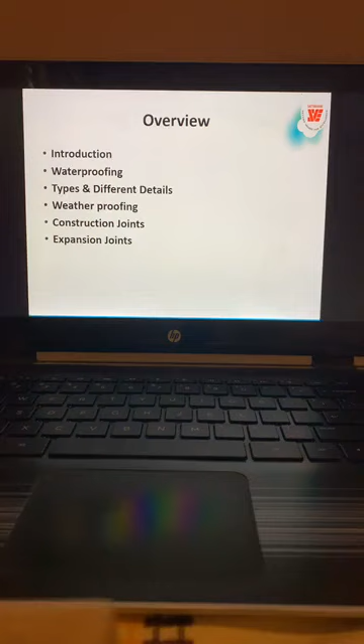So today is the first topic of the series, that is waterproofing and weatherproofing, which is a very important subject as far as built environment is concerned, and probably the most ignored subject. So today we'll be talking about these two aspects in addition to others. The overview of my topic is introduction, waterproofing methods and details, types of different details, weatherproofing, and we'll talk about construction joints and expansion joints. So this is the overview of my talk today. So we'll move on.

Humans need clothes like warm clothes, thermal clothes, raincoats, different coats we wear. Why not the same thing for buildings also? Structures also need, like humans, water and weatherproofing. Humans need water to live, and structures fight water to survive. This is a quote by me - when I was preparing this presentation, I got this thought. Yes, we need water to live; without water, a human being can't survive more than 2 or 3 days. But structures fight every day against water for their survival, that is durability.

So one way is to give water free passage to reduce its attack on structures. This is another method I followed in one of the projects - instead of fighting the water, give it an honorary exit from the structure, that means drainage. Allow the water to flow so that it won't attack our structure. So don't build the pressure, relieve the pressure. This is another method of protecting structures from water attack so that structures will survive.

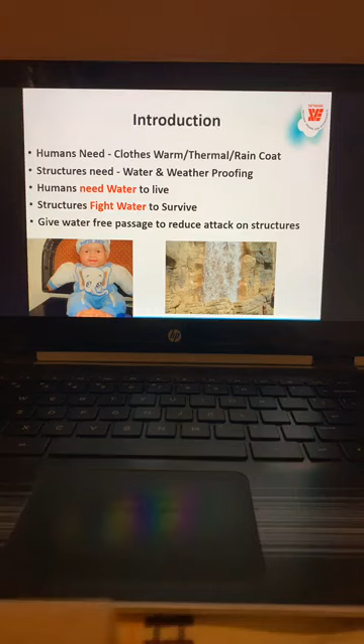So what is waterproofing actually? Waterproofing is a treatment to the structure, a protection to the structure, to prevent the contact of water, moisture, vapor or any other chemicals. Structures are in contact with water through the foundation - we can't build any structure without a foundation. So the foundation needs to be protected from these attacks like water and moisture. Above ground, it is moisture and vapor. These are the possible exposures for which we have to give coating to the structure - waterproof coating or protective coating.

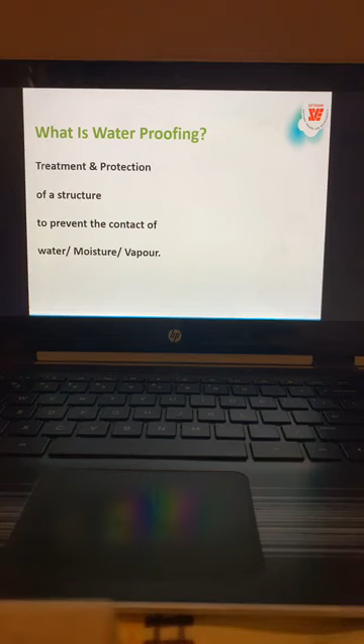So why waterproofing? To prevent water percolating concrete or any structural element as it is porous - mainly because concrete is porous and concrete is always reinforced, and reinforcement needs protection from corrosion due to exposure to the atmosphere. So we have to have this waterproofing layer as a barrier for the structure. People think waterproofing is for preventing water from entering. No - it's for preventing water from percolating into the concrete. Let us all remember that.

Another reason is to maintain cover for normal exposure conditions. If we don't do waterproofing, the cover to reinforcement, particularly in retaining walls, foundations, and slab on grade, has to be increased. Let us remember this - irrespective of water table, we have to increase this cover to prevent corrosion of reinforcement steel. That is another reason, because without waterproofing the reinforcement will corrode, whether we are able to see it or not, it will be corroding inside. So we require a waterproofing barrier.

For exposed structures above ground, from atmospheric humidity, vapor, and rain, we need a water barrier for the structure to enhance its durability. This is another important thing.

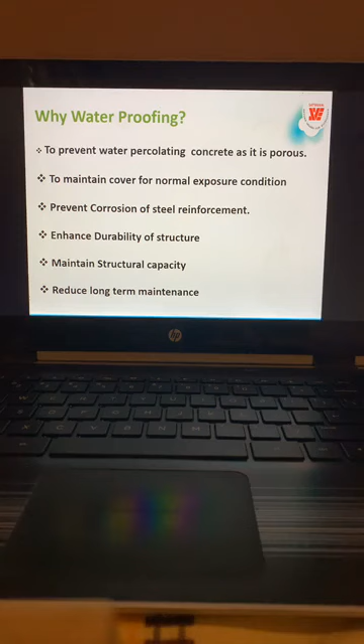So water penetration, how does it happen? We have honeycombs, sometimes very fine pores, shrinkage cracks, construction joints, expansion joints. These are all the causes where water can enter into the structure, so we have to take precautions to treat the structure for all these reasons.

And penetration into concrete happens due to capillary action - the pores in the concrete, since concrete is porous, not impervious. So to prevent water penetrating through capillary action, we have to have a water barrier. Next, hydrostatic pressure also forces water through pores - even without capillary action, sometimes hydrostatic pressure causes this penetration.

Thanks to my friend engineer Bheemrao, a consultant from Hyderabad, who after listening to my talk on RCC structures where I mentioned waterproofing for footings, shared photographs of a 25-year-old structure which was dismantled, and a photograph of a footing where the water table was 200 meters below ground level, showing corrosion in the reinforcement bar despite good concrete.

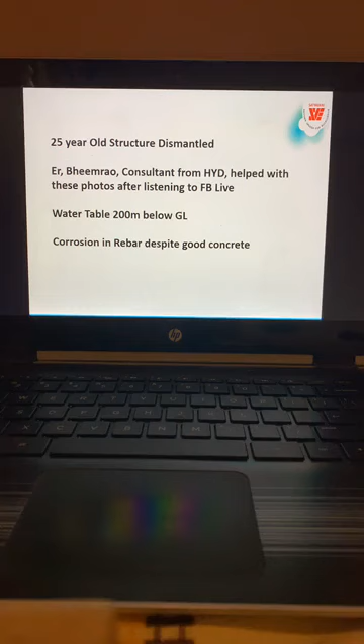You can see these pictures - here is the rebar, and this is the footing bottom. You can see the contact with the ground soil here, and there was extensive corrosion.

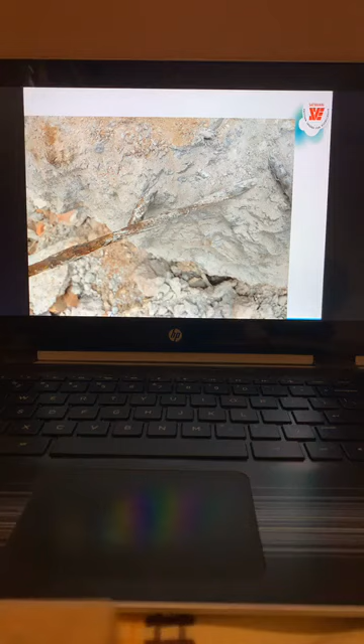I'll show you closer pictures so you can see - from this concrete you can tell it's good concrete, not very bad concrete, but still the rebar inside has started corrosion. This bar particularly is badly corroded. This is what I always say - because we can't see the condition of reinforcement below the footing, it is very difficult to assess the life of the structure, and this can cause a lot of distress in structures.

That is why I always say that below the footings, as we can see, there is no visible waterproofing here. In those days particularly, they were all depending on good concrete only and no waterproofing. So this is a good example I can quote for putting a waterproofing layer below the concrete.

We think that concrete is watertight - no, not in the long run. It has porosity.

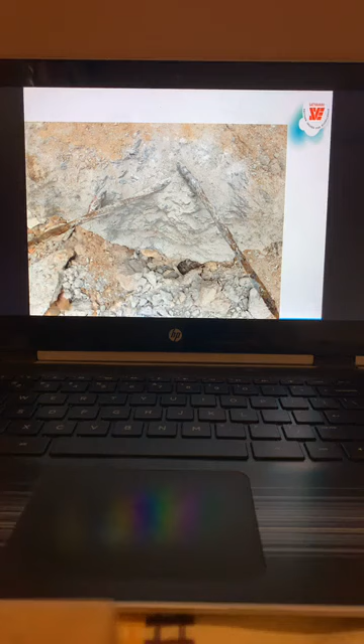So the next big source of dampness in the structure is toilets, as we all know. Toilets need good waterproofing treatment. What are all the causes? We have pipe penetration - pipes embedded into the blockwork or concrete, and mortar joints in the bricks - another reason through which toilets can let water penetrate into the structure.

And these are the nahni traps that we put in the floor drain, joints between the vertical plaster or tiles and the horizontal, form ties, joints in the ventilator, and the top wall joint between the structure and the wall, plus honeycombing in the concrete, and floor cracks, floor joint separation.

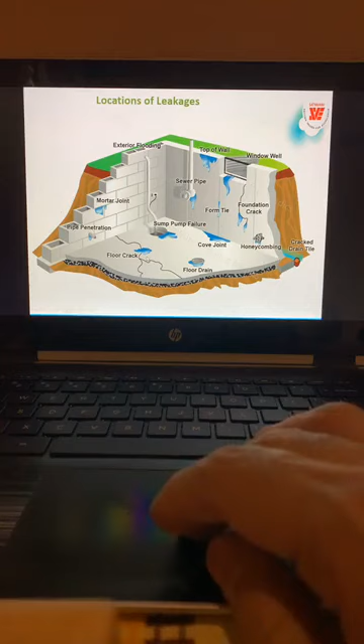So there are so many causes, because the toilet is an area with everyday exposure to dampness and water. So we have to treat these toilets properly - that's why I'm giving more details about toilets.

So even if you see most toilets, you will see ceiling paint peeling off - I don't know whether you've observed this or not. It will be corroding because of the vapor. Hot water is used in toilets and in bathroom wet areas.

So you will be seeing the peeling of the paint. That is mainly due to continuous exposure to vapor in bathrooms. We need to give a treatment to that, and another important thing in toilets is exhaust, because hot air always stays. If you don't provide exhaust at the top, hot air will stay and continuously attack the paint and it will peel off. So that is one main reason why we have to have exhaust in the toilets, to take away the vapor quickly so that our protection paint is also secured.

Next is where to apply waterproofing. This is a big question I always face, I keep arguing with engineers. Some people say that suppose you have a retaining wall, on the rear side, that is the positive side, wherever water comes in contact with the structure, that side only we should provide waterproofing. Negative side, please don't do that. On the opposite side of the water, there is no point doing waterproofing because the structure is already affected. If you allow water to enter the structure, the very purpose of waterproofing is lost. Doing waterproofing on the negative side - the name itself says negative - is only cosmetic, and it will deny you the ability to know exactly where the dampness or seepage is. If you do positive side, if there is seepage, you can see exactly where it's occurring and repair the structure and the waterproofing behind it too.

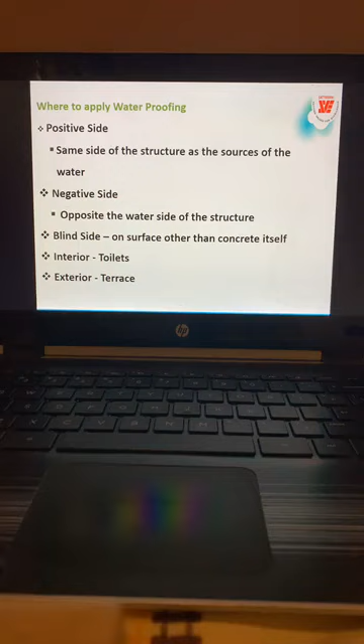And blind side, that is another method of application. Actually blind side is positive only, but suppose we have a raft foundation or footing concrete - before pouring the footing concrete, before placing the reinforcement, we'll apply the waterproofing membrane to the PCC. So the PCC surface has to be finished smooth, and we apply this membrane on the PCC. That is called blind side application. Then we put the protective sheet - bubble sheet or bubble wrap - and then put the reinforcement and the concrete. Next is the toilet's interior side and exterior terrace. So these are all the applications where we go for waterproofing.

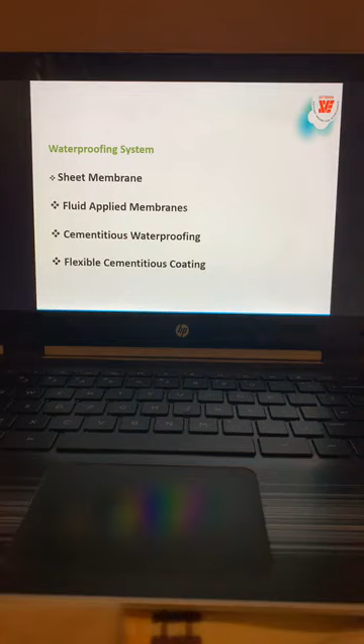Next is the sheet membrane systems of waterproofing - what are all the types? One is the sheet membrane, the other is fluid applied membranes, that is a fluid state which will set quickly and form a membrane. Cementitious waterproofing is not very good, but it can act as a protective coat, that's all. Then flexible cementitious coatings - you can mix the cementitious with polymer and apply, that's a flexible cementitious coating. Next is crystalline waterproofing. Crystalline waterproofing is not a membrane, but it will make the cover portion of the concrete impervious, less porous actually. So it can only be a secondary waterproofing, it cannot be the primary waterproofing.

Primary waterproofing is always accessible, to whoever is talking about accessibility for retaining walls behind. As per IS code, you have to leave at least 1.2 meters clear gap between, even to put the shuttering. So if you are doing any retaining wall without shuttering, that means facing the rock concreting, then do a blind side - apply the waterproofing to the rock, put a protective sheet, and then put the reinforcement and concrete. Please remember, don't find any reason for not doing waterproofing on the positive side. So crystalline waterproofing is a secondary method, and flexible cementitious coatings is also a second option. The first option is a proper membrane, polymer based membranes.

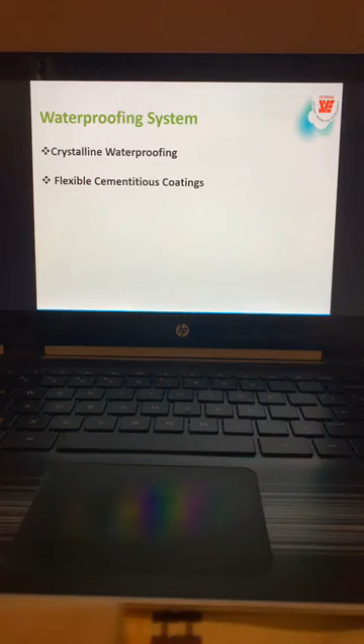That's why we have resorted to reinforced concrete with weatherproofing, with brickbat or insulation. So the overall thickness is only 200 mm or 20 centimeters - we have brought it down to one third.

So types of waterproofing: we have tar felt waterproofing, which is not very good. It has failed many times. I have visited sites where this tar felt decayed because of exposure to water.

Next is the bitumen torched sheet BTS membranes, physical sheet membranes like Multiplas and PVC membranes, and integral waterproofing compounds. That's not very good.

That is only secondary or tertiary treatment. Like structure, it will reduce the porosity in the concrete. Crystalline waterproofing is also secondary, in the cover portion, or nowadays they are adding crystalline powder to the concrete to make it less pervious. Cementitious waterproofing is also a second preference.

Acrylic based polymer coatings are good, and protective and decorative coatings are for structures above ground, particularly urban infrastructure, which require definite coating.

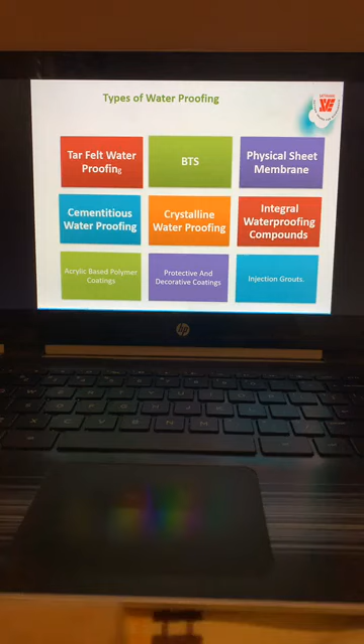We can do grouting from the inside, to the rear side of the wall, the retaining wall particularly. We made the holes, grout holes, in the retaining wall, and we pumped the grout material behind the wall, and we have formed a barrier behind.

So whatever gaps are there, they'll be filled with this acrylic based polymer. It is costly, but you have to do it if you have not done it on the blind side. So always prefer blind side.

Before casting retaining wall concrete, please apply the membrane to the rock surface exposed.

Next is bentonite waterproofing. This is mainly used for piling. Whenever we do piling in soils, after drilling and boring, the borehole is done, we keep applying the bentonite so that the collapse doesn't happen to the piles.

Next is metal oxide waterproofing, that also is one of the materials. And sheet membrane waterproofing: APP modified membrane, EPDM membranes, and PVC membranes. So these are all the sheet membrane waterproofings that are available.

And concrete admixtures, that is integral waterproofing, which I was telling. Crystalline admixtures added in batching plants is not a very good thing.

Actually, crystalline treatment starts with, suppose we do the PCC, you sprinkle the powder on the PCC uniformly at about 1 kg per 10 square meters usage. You sprinkle it, then when we pour the concrete, this crystalline agent will penetrate up to 100 mm thickness of the concrete in the bottom layer. That is a better method than making the entire concrete with crystalline.

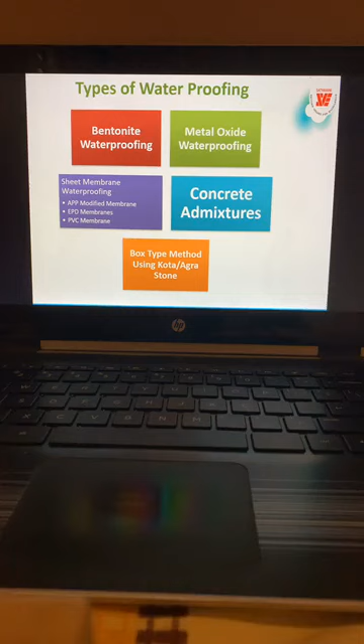Waterproofing for apartments and villas is membrane. Use the membrane, and if it is very important, go for EPDM membranes.

Next is the toilet waterproofing. I will explain more in detail because it's an important thing. We have these tile joints, we have these pipe joints which have to be treated, and then we have the skirting and flooring. Before that, we have to protect the concrete structure.

Here you can see the nahani trap and pipe puncture. So we have to do waterproofing first for the entire floor and up to this height, at least skirting height and beyond. One layer of skirting, we have to do the waterproofing, and then test this waterproofing with water ponding, nothing other than water ponding.

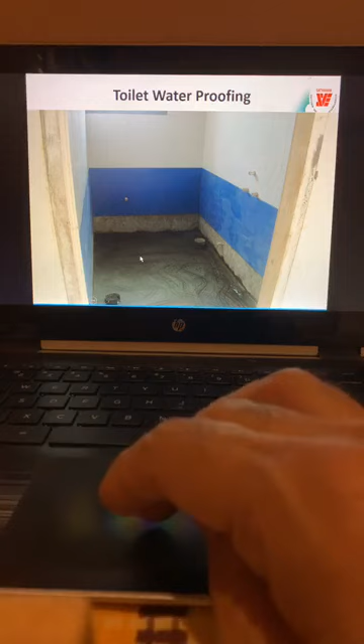And even for 7 days we did the test. The main thing is this joint treatment for the nahani trap and all. I'll share those details of how to provide this waterproofing in the toilets particularly.

And the retaining wall, outside the retaining wall, waterproofing is to be done, and below the footings and below the grade slab, below the piles, caps even. So this entire layer is done.

And next we have this gardening, landscape. So below the landscape also we need the waterproofing. And toilet, you can see here the entire area is waterproofed.

And balconies, it's a very important detail for balconies. Suppose you have a door frame here, you have to give a recess for the fixing of the door frame. That means if you have concrete floor level 0 here, the door frame level you make it minus 25 mm, and for the balcony you make it minimum minus 50 mm.

So there will be one step to the door frame and next step to the flooring. So you should do the waterproofing up to the door frame edge. This is very important for external doors. Otherwise the seepage source, for somebody asking about skirting exposure, is one source - balconies. Whenever there is rainfall, there will be water entering into the structure. So we should always protect the whole structure from water, and good plaster outside is also very important with the protective coating.

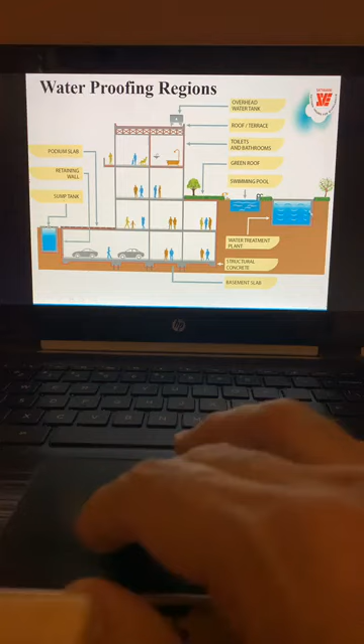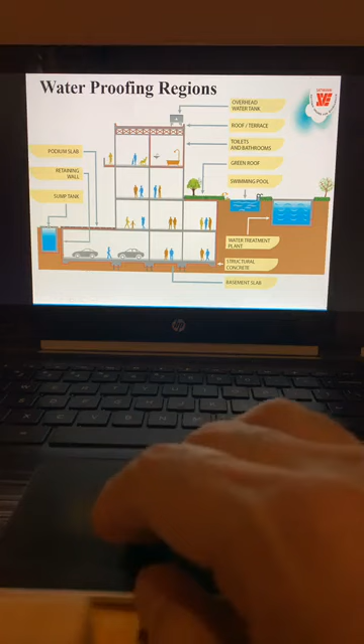This terrace has water tanks, underground sumps, a water treatment plant below the ground, and a swimming pool. So all these are the sources of water, and we have to protect this structure from all these sources. Wherever the structure is exposed to water or vapor, we have to give protection. That is the basic ideology, the design intent of waterproofing.

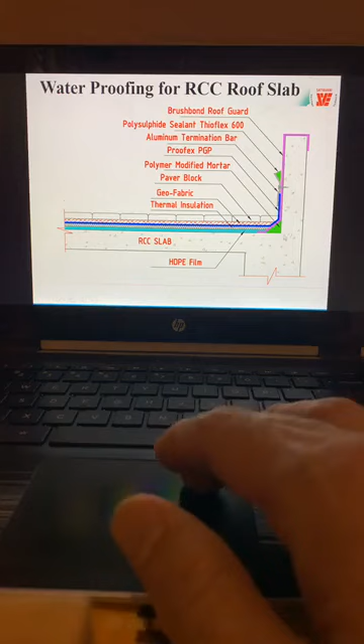Don't forget, you have to give a detail for the downtake pipe entry here. That detail also you have to follow very carefully.

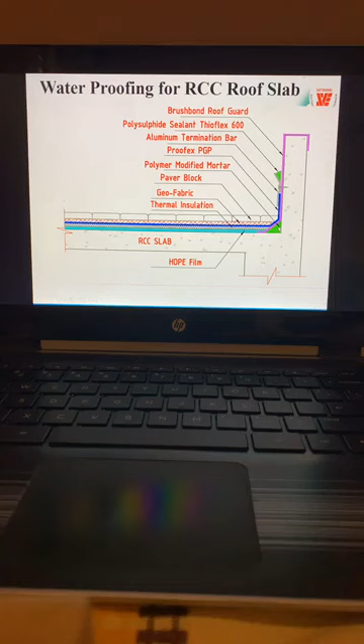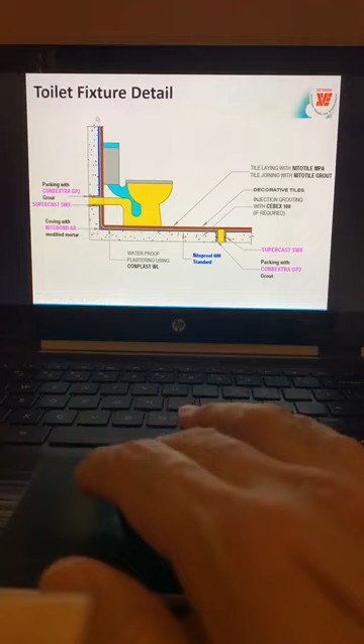The waterproofing membrane should always have a smooth surface—there should not be any reentrant corners or sharp corners. We use tile laying with adhesive, Nitotile grout, and decorative tiles on top, and injection grout with Cebex if required into the concrete. These are all the details you can follow. At the joint in the nahani trap, use grout behind the pipe and then apply the waterproofing completely, so that the entire region is blocked from water entering into the structure.

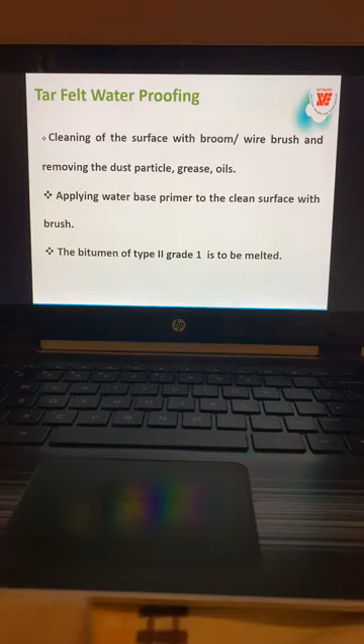Next is tar felt waterproofing. Clean the surface with a broom—this is the method I'm explaining—wire brush to remove dust particles, grease, oils, and all that, then apply water-based primer to clean the surface with a brush. Then bitumen of type 2 grade 1 is melted and a coat of hot bitumen is applied to the surface, then lay a tar felt sheet and keep pressing with wood or hard foam. Again apply a coat of hot bitumen over the sheet and fix another tar felt sheet to make a sandwich, finally a coat of hot bitumen over the second sheet.

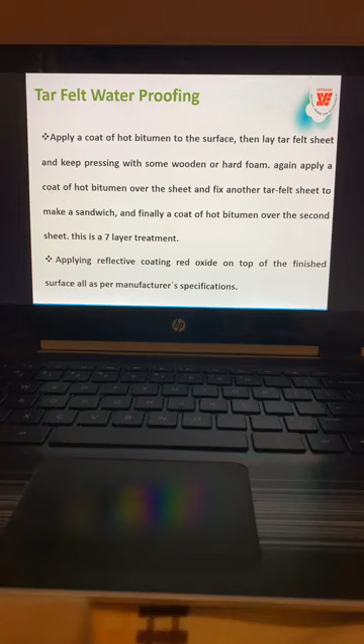This is a 7-layer treatment when using bitumen, applying reflective red oxide coating on top of the finished surface per manufacturer specification to reduce heat attack, since bitumen melts in hot temperatures. So we have hot bitumen applied, then a layer of tar felt, and again a second layer of hot bitumen. These layers are staggered so that the joint is not exposed—that is an important point.

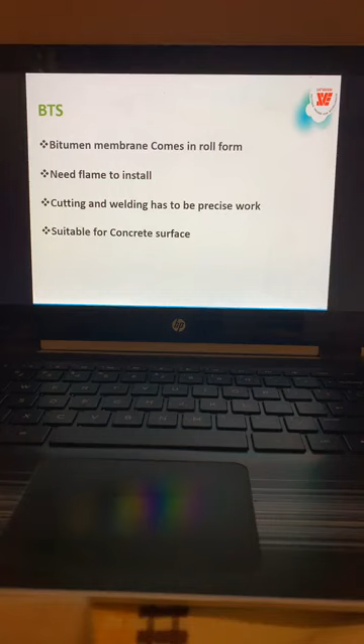BTS membrane comes in roll form again, and needs flame to install, and cutting and welding has to be precise work. This is again manpower skill dependent. So we have to test all the joints thoroughly, and the joint overlapping is very important, suitable for concrete surfaces, starting at the low point from the roof, that means at the downtake pipe, unroll the membrane.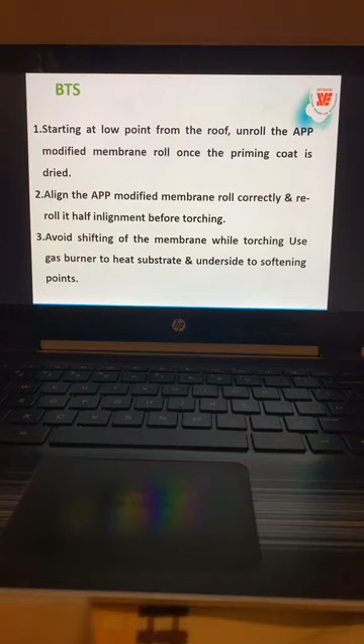Unroll the APP modified membrane roll once the prime coat is dried. Align the APP modified membrane roll correctly and re-roll it halfway in alignment before torching, and avoid shifting of the membrane while torching. Use gas burner to heat the substrate and underside to softening.

My idea is not to read this method, but I want all of you to read this method and ask for the method statement every time you install this waterproofing from the vendor, from the manufacturer, so that you should implement that method statement, so that later they cannot complain you have followed some other method. So the method statement should be signed by the vendor, signed by the supervisor, and signed by the consultant. If all three agree on the method and it is implemented, then the warranty will come into play.

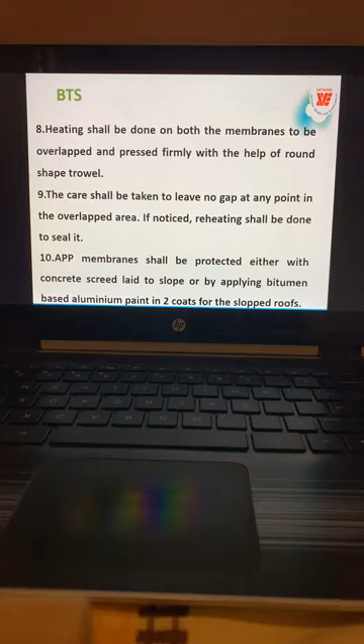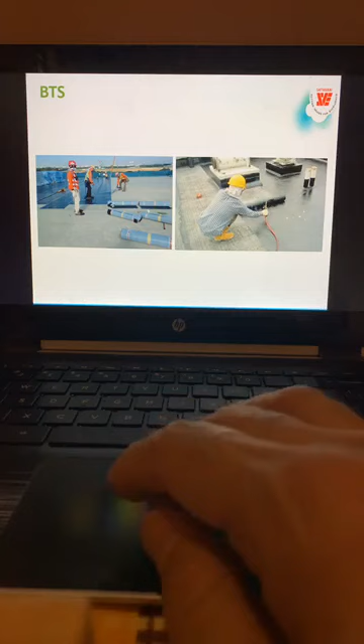Heating shall be done on both the membranes to be overlapped and pressed firmly. So let us go to this. This is the torched membrane being torched and spread, so here you can see wherever you get any surfaces that are protruding out of the terrace, you should apply to that surface also. This is a very important method of application. Here you can see all the rolls torched and spread.

Next is the cementitious products, probably the easiest waterproofing and cheapest material, but not a very preferable one. You can use it where it is less important, and they are readily available.

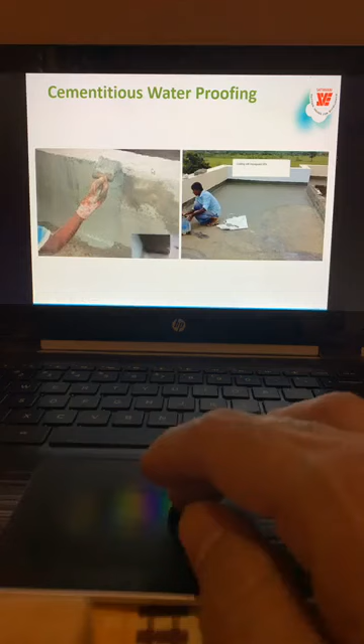So next is this cementitious waterproofing. You can see from the parapet wall top also you have to apply, and in the parapet wall also you should provide the coping preferably, or slope in the top surface.

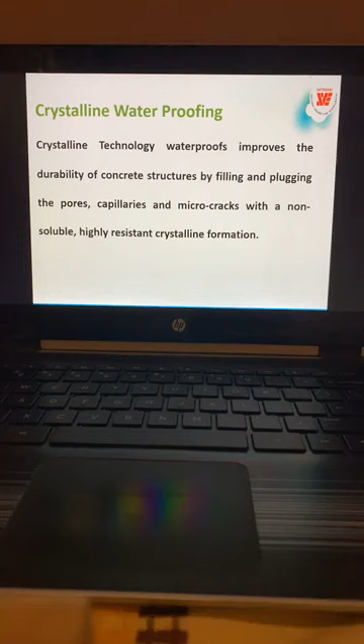Next is the crystalline waterproofing. It improves the durability of concrete structures by filling and plugging the pores, capillaries and micro cracks, and it cannot be a barrier actually. So even after using membrane, you better have the crystallization where it is very important. That is, when the primary defense fails, this acts as a secondary defense for concrete, but the primary defense is always very important. Crystalline waterproofing application you can see on top of the concrete surface, then it will penetrate into the concrete also and form a layer.

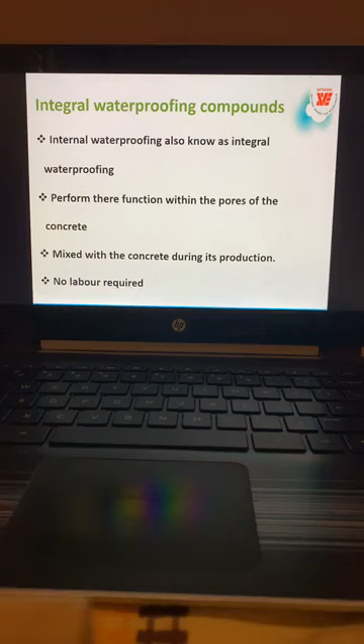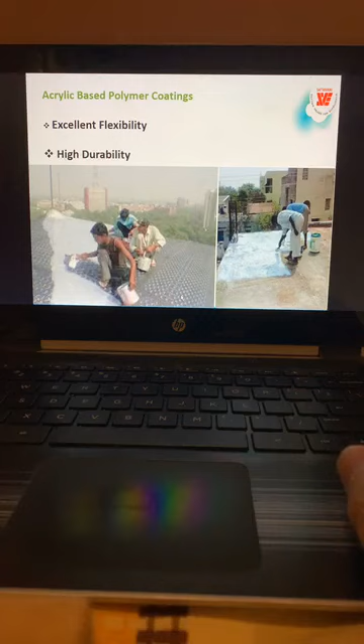Integral waterproofing compounds are a very old method where it will fill the voids when the concrete sets. So the acrylic based polymer coatings, you can see this, on the terrace the acrylic based polymer coatings are applied. They are very flexible and highly durable, and they can be applied.

I'm going to the expansion joints towards the end. I'll cover the expansion joints also.

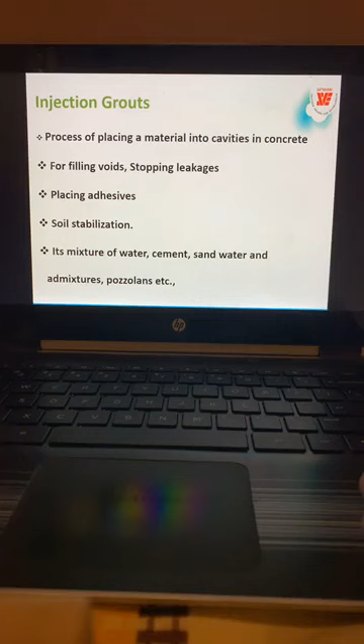And placing adhesives, soil stabilization, it's a mixture of water, sand, cement, and admixtures and pozzolanas. And suspension grouts, we have pure cement with water, and liquid grout or solution grout that consists of chemical products, mostly sodium silicate and certain resins. So we grout them, they will be acting as suspension grouts.

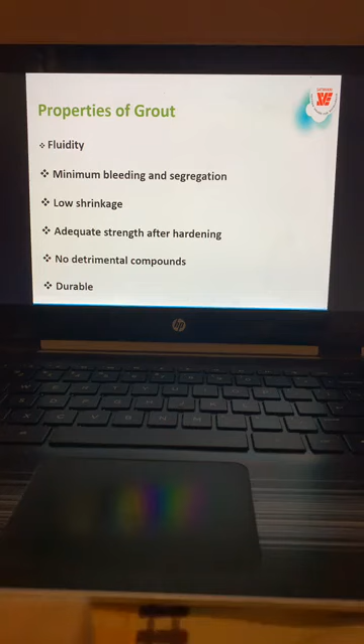Fluidity is very important, and minimum bleeding and segregation, and low shrinkage, and adequate strength after hardening, and no detrimental compounds in the grout, and the durability of the grout. These are the characteristics of the grouting material.

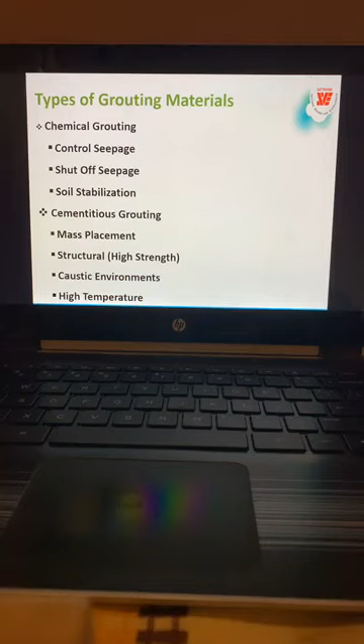So we do chemical grouting to control the seepage, shut off seepage, or soil stabilization. Cementitious grouts, we do mass placements and structural high strength and caustic environments and high temperature areas. And we do epoxy grouting to seal cracks, and bolt anchoring we do, and where the gap is maintained less, and base plate leveling, that is for below the base plate, and in acidic environments we use the epoxy grouts.

Because cement doesn't work in acidic environments, polyester grouts are used for bolt anchoring, and silicon grouts for smoke seals and fire stops. So these are the materials for grouting.

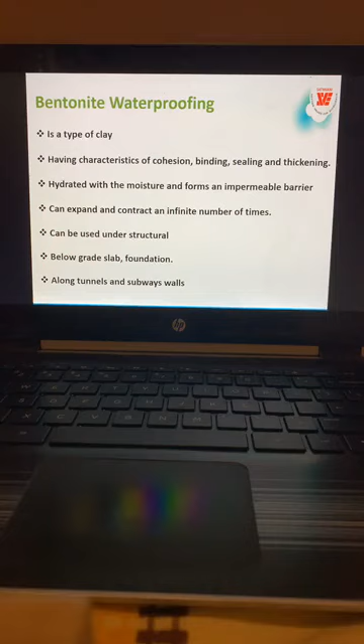Bentonite waterproofing - bentonite is actually a clay type having characteristics of cohesion, binding, sealing and thickening. It hydrates with moisture and forms an impermeable barrier, and can expand and contract an infinite number of times. It can be used under structures like piles, below grade slab foundations, and along tunnels and subway walls.

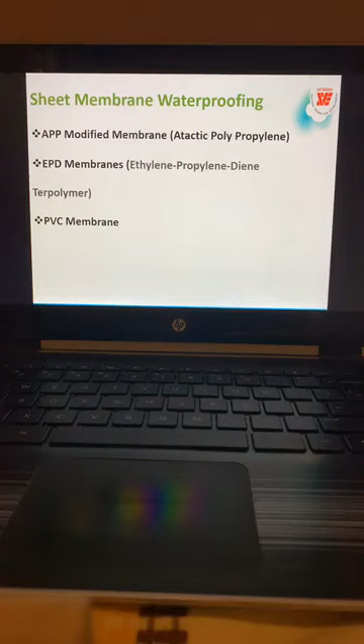APP modified membrane - that is atactic polypropylene membrane. And EPD membrane, that is ethylene propylene diene terpolymer, that is EPD expansion. And PVC membrane, that is another PVC sheet. HDP can also be used.

APP modified membrane is a technique used to cover the joints by fixing membranes. These membranes provide superior tensile strength, that is expandability - people talk about 300% and 400%. Additionally, with APP membranes, two layers of two different APP membranes are fixed with insertion of a backer rod, and then the whole work is veneered by covering it with brickwork and plaster, or fixed using gas burners.

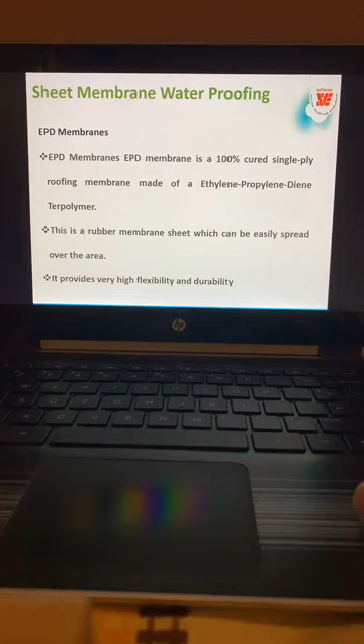EPD membranes - I'll show the photographs. EPD membrane is a 100% cured single ply roofing membrane made of ethylene propylene diene terpolymer, and this is a rubber membrane sheet which can be easily spread over the area. It provides very high flexibility and durability. I'll show this photograph - this is EPD membrane application, you can see in layers and with adhesive, and then two layers minimum.

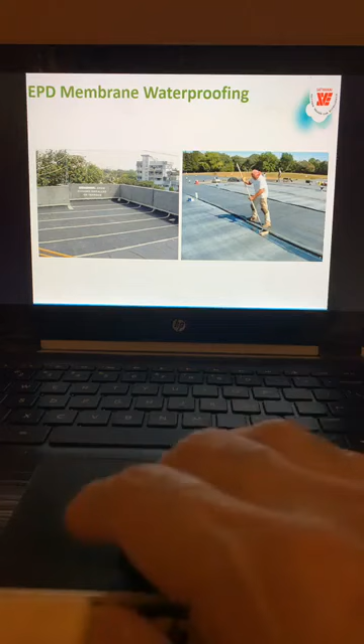PVC membrane is fiberglass reinforced because of the flexibility required for the membrane, with exceptional dimensional stability and low coefficient of thermal expansion, fully encapsulating the fiberglass reinforcement. So there is no risk of delamination or water wicking - that is the advantage of this.

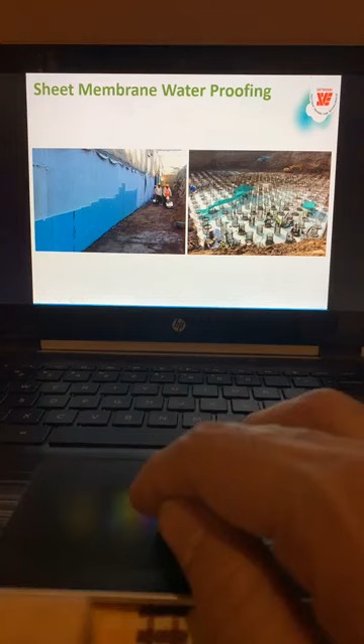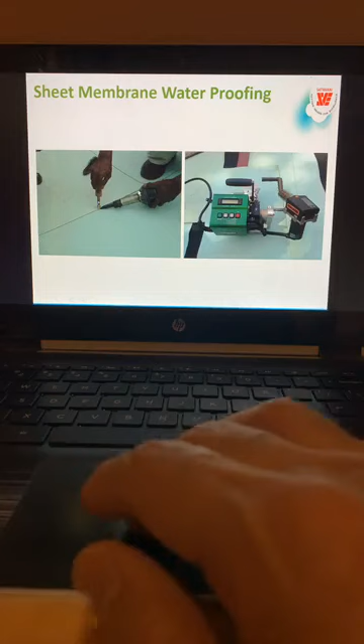And this is where pile raft is there. Here you can see all the piles are done, and around every pile there will be one ring of sheet, so that there will be overlapping. I'll show the detail in the drawing. This is the sheet membrane waterproofing, how we join at the joints and terminate the joints.

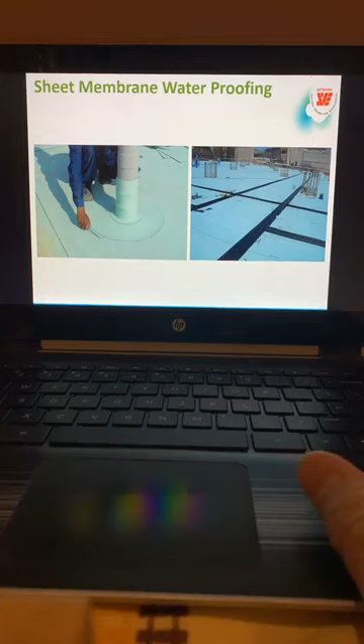I'll show that breaker rod. Sheet membrane waterproofing - you can see this is what always, whenever you have a pipe going through the structure, you have to put it to the pipe and then overlap with another sheet, and this is the main membrane. So this is a very important detail you should follow, APP membrane or any sheet membrane.

So this is the joint welding that is being done. And this is that pile I was talking about. So put a ring and then apply the proper membrane all around and tie it tightly. So this is the sheet membrane waterproofing.

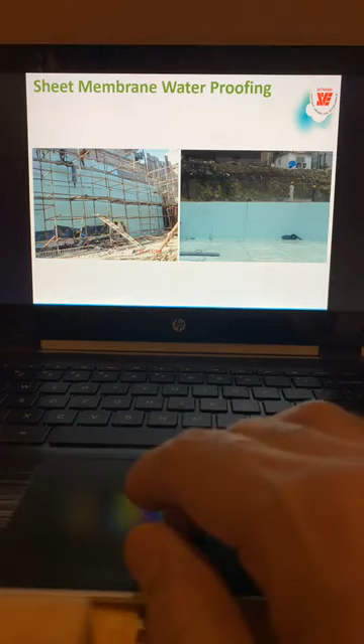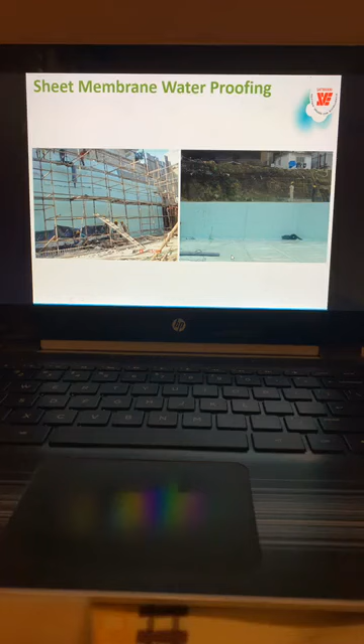After we put the sheet membrane, we put the protective sheet, bubble sheet or bubble wrap or dimple sheet, and then put the reinforcement, then the shuttering and concrete. Here you can see work in progress - membrane, protection sheet, and then concrete is done.

Concrete admixtures. As always, somebody said the concrete can also be a water barrier if it is very well done. That means the mix design to reduce the porosity, that means reduce the water cement ratio, and then the concrete can be good. We have chemically active pore filling materials - silicate of soda, aluminum zinc sulfates, and aluminum calcium chloride.

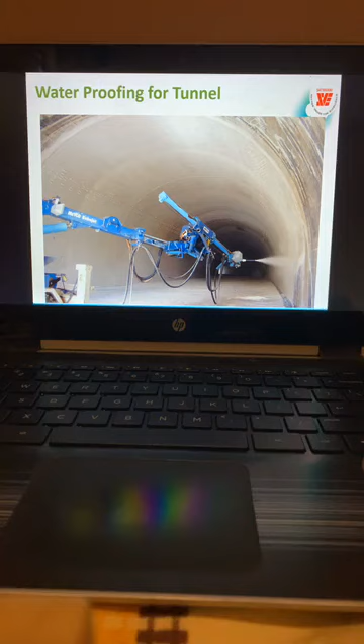But nothing beats the membrane anyway. So tunnel waterproofing is done - we have to do it outside also and inside also. So this is the waterproofing layer being done on the tunnel.

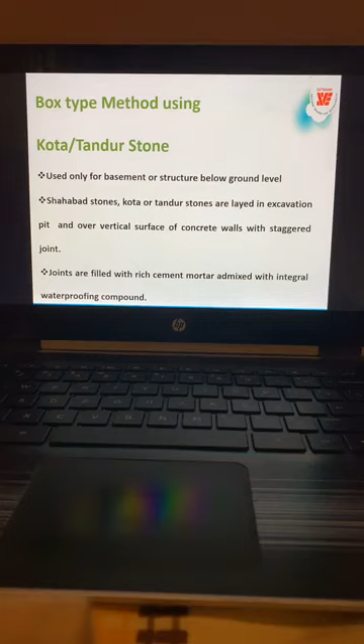And then the box type method - it is a very age old method. I have done some projects 25 years back, no complaints at all. This is used only for basement or structure below ground level. Shahabad stone, Kota stone or Tandur stone in Hyderabad particularly are laid in the excavated pit and over the vertical surface of the concrete walls with a staggered joint. That means it's called double box type, with 2 layers of stone.

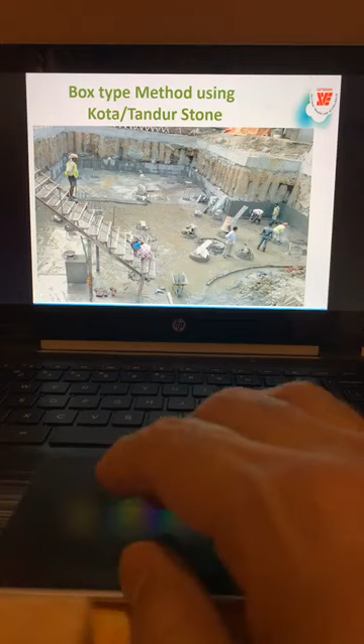So this is a waterproofing drawing. This is the box type waterproofing being done. We put the stone layer, 1st and 2nd layer, and to the wall also we'll put the box type, and then you can see the shoring, and to the shoring we are putting the stone. We are literally doing brickwork, 2 layers of stone.

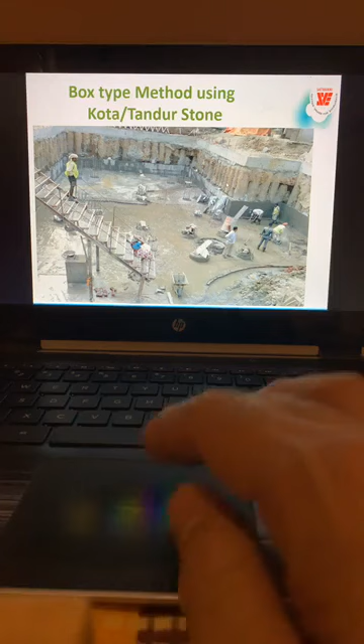And here you can see more clearly the stone layer, 2 layers of stone with gaps filled with non-shrink grout, preferably non-shrink grout. Use the non-shrink grout.

Next is weatherproofing. The most widely used method of weatherproofing is brickbat coba. Please, no compromise on this unless it is a very low cost and people can't afford it. But always use some layer of weatherproofing, at least clay tiles. You put a layer of clay tiles on top. That's very important. So this is the detail.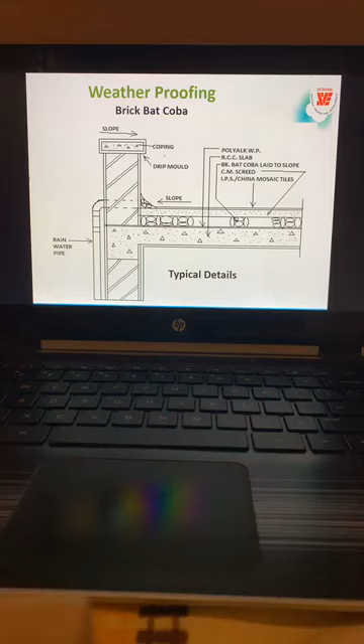Yeah, box type is laborious and tedious. That's why we have shifted to membranes now, and more polymer modified membranes with liquid application. That is the fastest actually. And sprays, now we are having sprays. Brickbat Coba, to tell you frankly, for me as a consultant, it is still a challenge to give. I keep working with the best contractors, best products. Still I have problems because of the method.

Ultimately, the workmen control the quality of waterproofing and weatherproofing. Particularly, the combination of these two is the bigger challenge. And you can see here, this is the brickbat Coba. So all the bricks, actually when you do the brickwork, the wastage of the brickwork can be used at the terrace. That is the main idea of this.

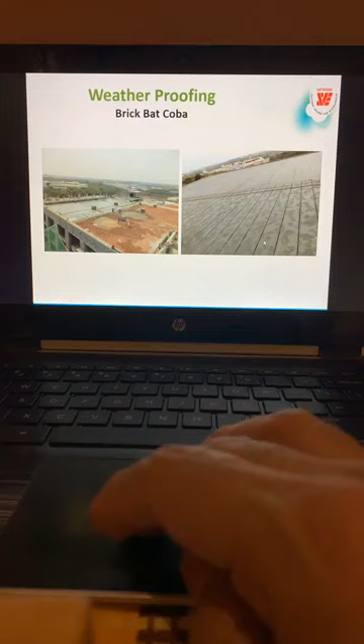And in the north, I have come across mud fuska being done on the top terrace as a weatherproofing method actually. So this is the brickbat Coba. After that, on the top cement layer, you have to put the grid lines. This is to prevent shrinkage cracks in the cement finish on top.

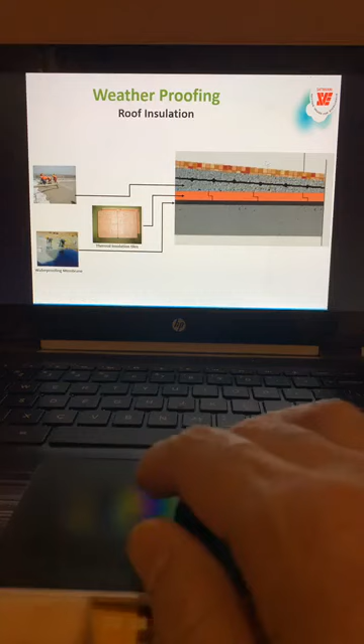This works well. So this is the roof insulation. You can see the waterproofing membrane first, and then thermal insulation, and then we have another layer of waterproofing.

So this is the MasterSeal. I'm using some trade names, but please don't go by this company only. So this is the MasterSeal waterproofing coating and coping using polymer modified mortar here. This is the haunch portion.

And then we have Perpor Elastopor board. This is for insulation, PU spray foam insulation. And then we have Thermocrete on top of this. We have the Thermocrete for forming the slopes. And then we have another bedding mortar and the stone tile we use finally as a protective layer and wear and tear layer.

And then use the tile grout. This is very important again, because otherwise this becomes the source of leakage.

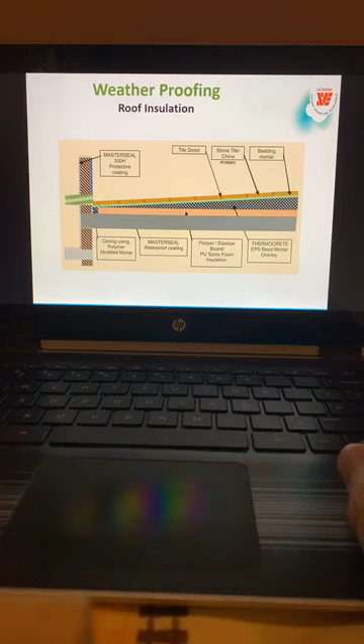So to prevent passage of water through construction, water stops. Now we are talking particularly about water retaining structures, overhead tanks and underground sumps. We have to use water bars in the construction joint for the movement of the joints. Strips of rubber are modified with the hydrophilic agent, and they swell in the presence of water or moisture, and we also use copper strips.

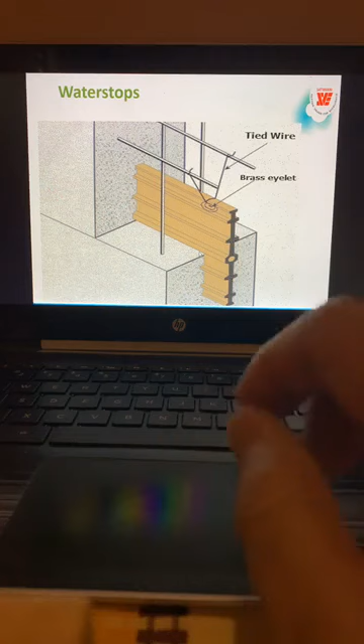So this is one PVC water bar which we can use. This is the brass eyelet and tied wire. You can tie it through this and this will increase the water path. That is the idea of this water bar. So even if the water would have entered at this construction joint, it will not allow it to pass - it will dampen the water flow actually. That is the main thing.

So these are the water stops. This is for expansion and contraction. They give this hole actually. And this is the construction joint. You can see the raft slab and the wall. In between we use the water stop here. And this is the reinforcement.

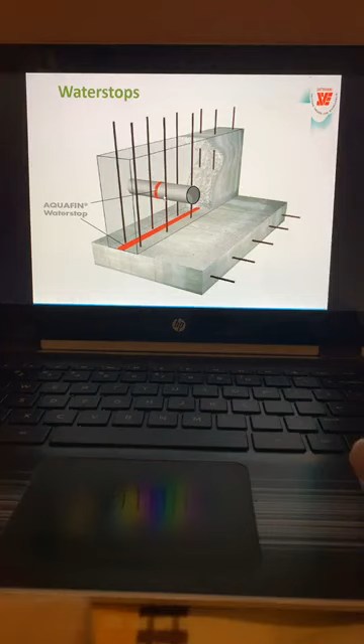And then we also use these water stops for the flange pipes. Any water tank will have inlet outlet pipes, and for those pipes we have what is called a puddle flange pipe. So there will be a flange, and at the flange also we have to provide the water bar. And here you can see water bar at the wall and raft joint.

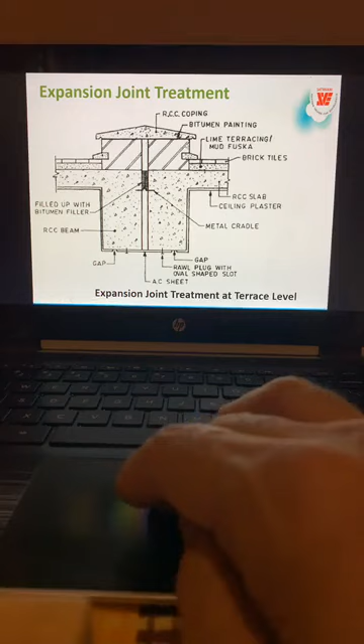Then to allow it to move, apply bitumen paint on top and below the concrete slab. This is even if water enters, the cutoff here - so this is the kind of detail you have to follow. Below the joint you have to have an AC sheet or GI sheet we use.

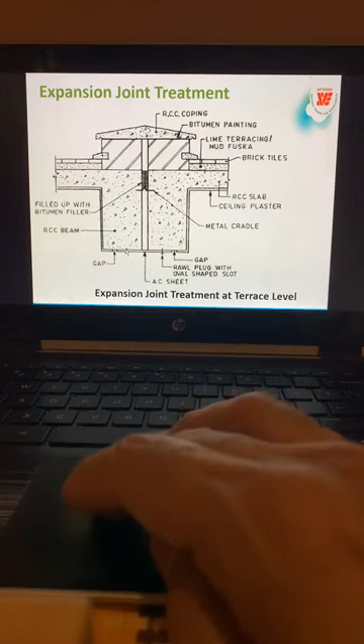And the gap you have to maintain to allow it to move again. So one side will fix the screw and the other side is a slotted hole, oval shaped, to allow it to move - like a roller and hinge here. This is a very important detail. I want everyone to use this detail for terrace expansion joint treatment. This only will work, otherwise it is likely to fail.

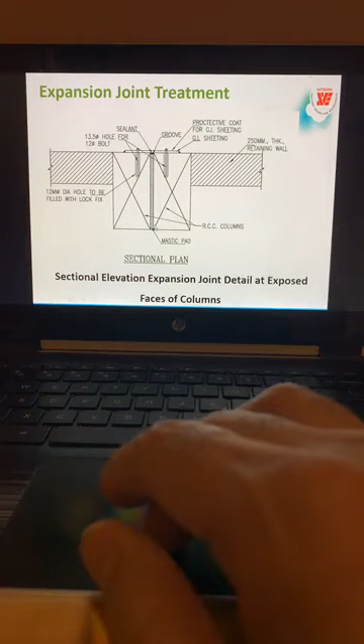This is a mastic pad - another detail - and sealant is used above the mastic pad, polysulfide sealant, and the groove is filled with sealant, then put the protective coat with the GI sheeting. This is another method of expansion joint, and we put an AC sheet or GI sheet below this.

Next is the 2 columns expansion joint in elevation - sectional elevation of exposed faces of the columns. This is a slotted hole you can see here, and this is the fixed hole. So you put the sheet.

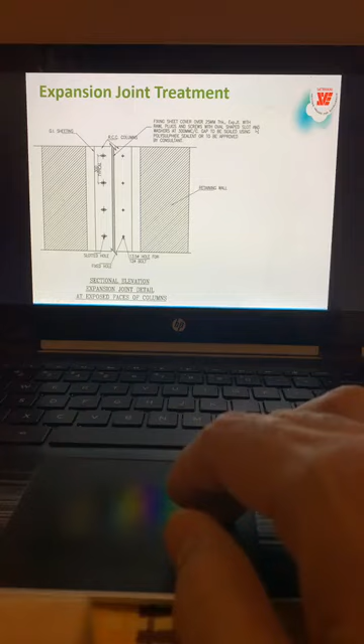Fixing of sheet cover of 25mm thick expansion joint with rawl plugs and screws, with the oval shaped slot washers, 300mm c/c, gap to be sealed using polysulfide sealant, or to be approved by the consultant in between. So you put the sealant first and then this - exterior treatment with a GI sheet.

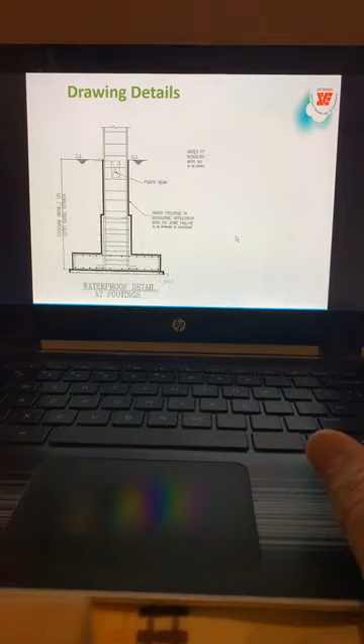Here you can see we apply waterproofing to the PCC first, then on the side of the footing and top of the footing, then pedestal and up to the ground level. And then your plinth beam and all detail will come.

So this is very important - you can see the whole column. That means we are protecting the structure from all sides - from the bottom of the footing, from the sides, and from the pedestal all around.